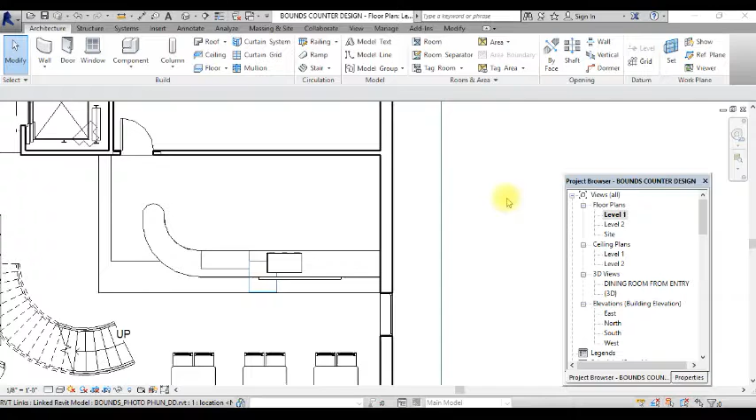Welcome to this session where we're going to develop our countertops in 3D. I'm working in the counter design drawing, which is the link drawing, and I'm going to make a rear counter now. I've got the front counter made with a cutout for the point of sale system, and I've got the espresso machine in there. Now I'm going to make the rear counter.

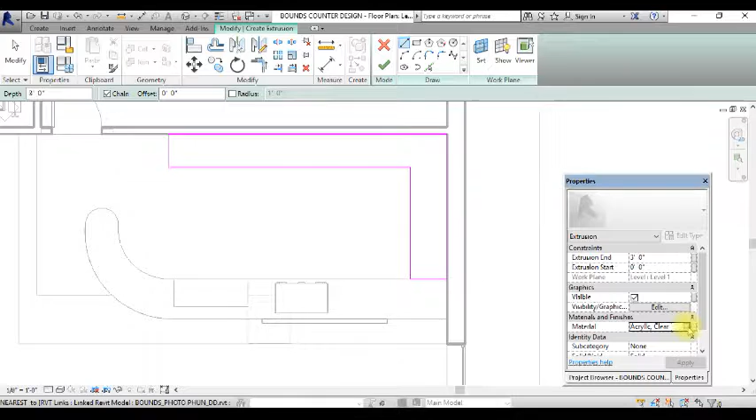You all know how to do this extrusion. I'm going to make this part of the counter a little bit higher than the front part. The front part of the counter I have at 2 foot 10 inches, which complies with my ADA requirements. The back part of the counter I decided I want a little bit higher, so I'm going to make it 2 inches higher, ending the extrusion at 3 feet.

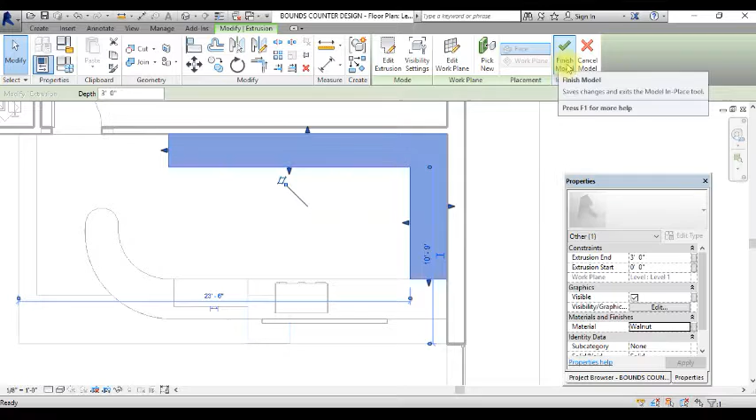To keep things simple, I'm just going to select the standard walnut that's already in the program, and I'll be able to use this same material in the other part of the project, so the materials are going to coordinate.

So we're going to make another component, in casework, and it's going to be the countertop now. This will be for the front part, and I want a little bit of an overhang on the front part because of the way that I'm going to end up doing the base.

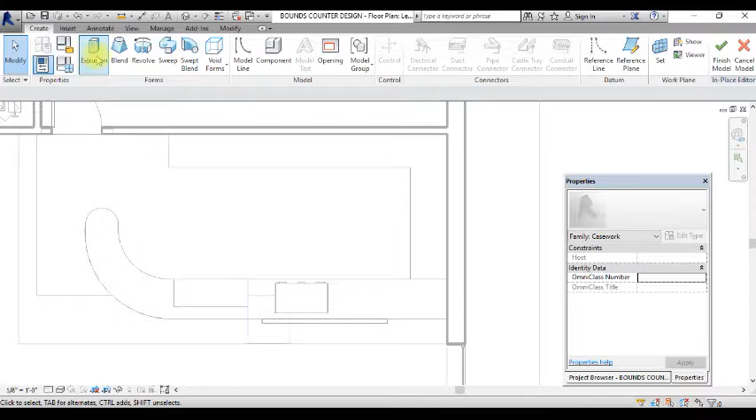We've talked about the 3-inch recess on a base cabinet, but if you overhang your countertop enough, you can make up for that recess this way. I'm going to separate this part of the counter just for now because I'm showing you how, and I'm developing this design myself.

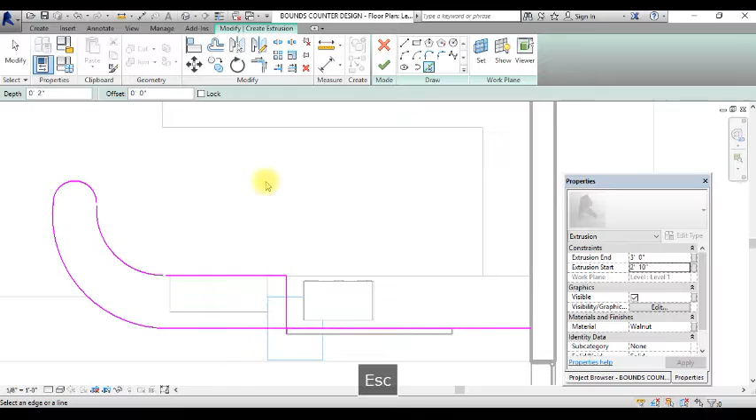So what I just got was the pick tool, the pick line tool, and I'm picking the countertop that's already there, and I'm going to break it at this line and just get rid of this other part.

Now I'm going to offset it 2 inches and let it be on copy there so that I have a 2-inch overhang on all sides of the countertop.

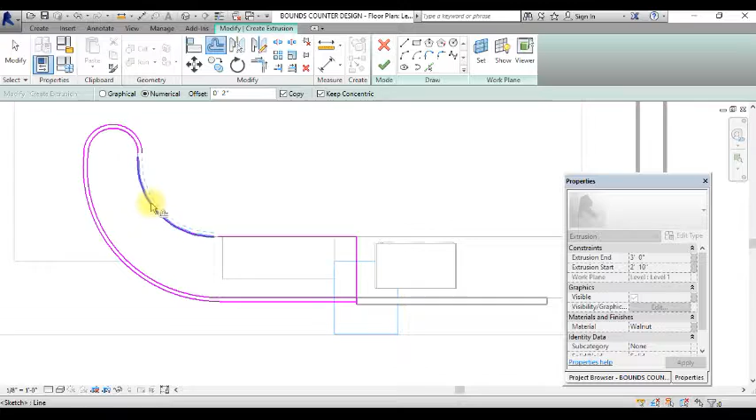Now I don't need it on the inside. I made a mistake there, I'm going to erase that. But I don't need it on the right side either. I'm going to end up extending that a little bit later.

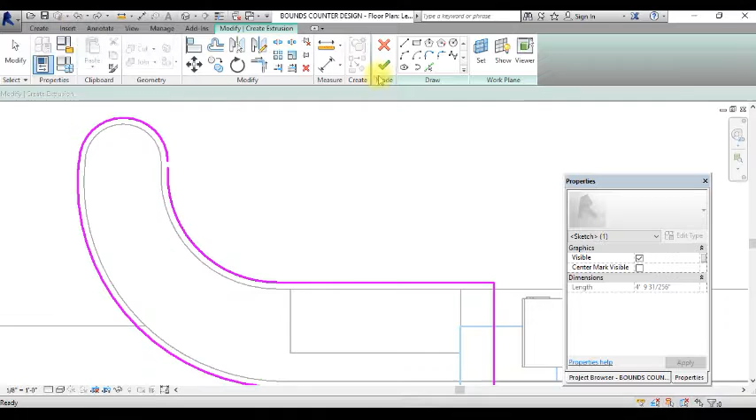Now, it doesn't work really well to fillet the curves, and it's going to change the diameter if I do this, so I'm just going to add a small line to join this gap.

I'm going to check off on that for a minute, but I'm going to check on the material, and I don't have my solid surface countertop, so I go back and I manage that and get that in there.

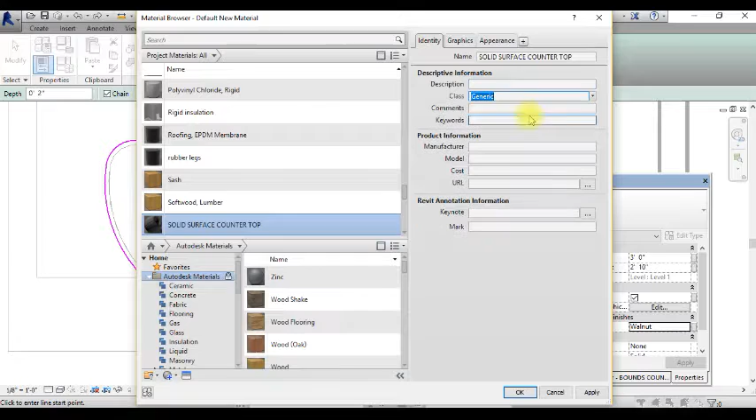So making your materials in advance is very helpful. Here's where I'm going to update the material so that I can find it later under stone, and I'm making the material - I've preloaded a library called Material Package 1, and I just have it in a file as I've suggested for you to do. And of course I'm going to change the scale to be appropriate to the sample that I have.

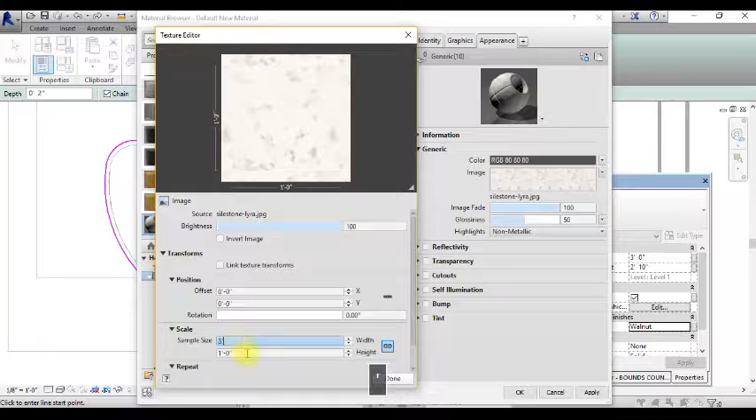Actually I ended up deciding that the 1 foot scale was the better one. So you just have to experiment and look at it, and then come back and fool with it later.

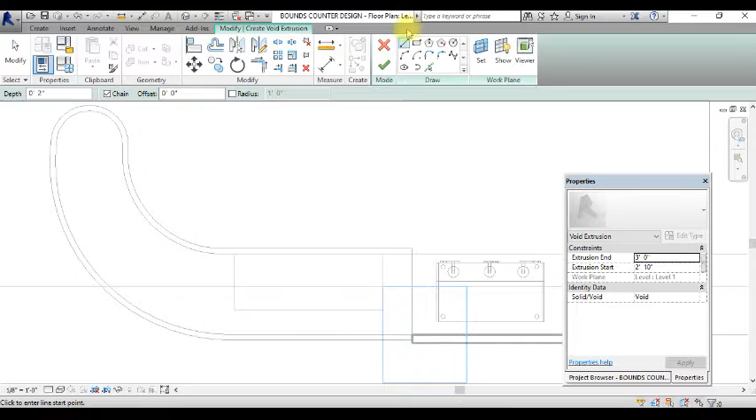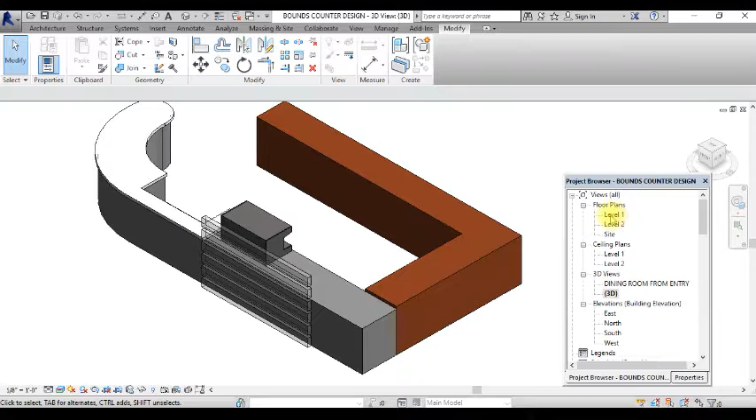So there I've made the countertop cutout. I've got it in solid surface, I've got my extrusion in the back, and I'm going to proceed on to make the countertop in the front the same method that I've done before.

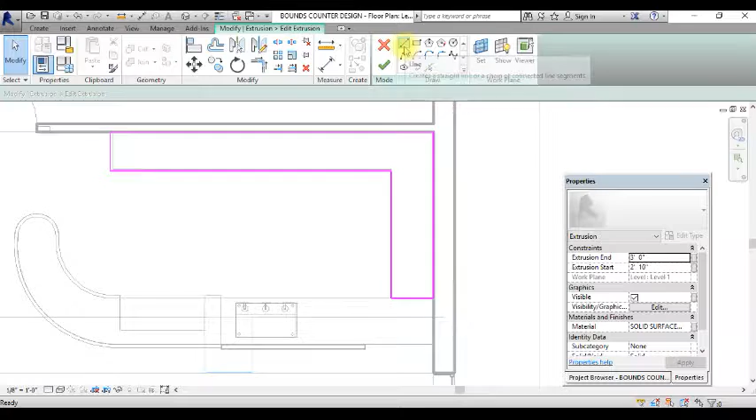We'll come back to this in just a minute. So here we are. I've made the countertop extrusion in the back, and now I'm going to make a cutout in it for the sink. I don't need to make the cutout, but I can make the cutout in the extrusion below as well, and I'll show you how to do that a little bit later.

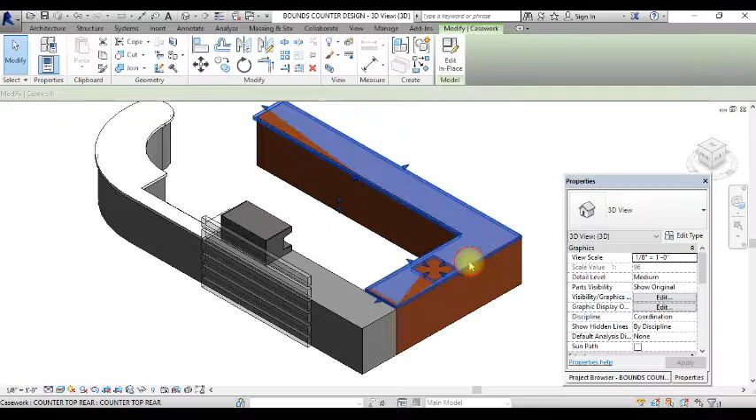So we're going to look at it, and here my countertop is too low into the counter itself, so I need to go back and edit the extrusion in order to raise it up again. I can edit it in this 3D isometric mode, going back to edit the extrusion. I have to click in a couple of times, and I'm going to move it up from the bottom being at 2'10" to the bottom being at 3 feet and raising up to 3'2". And there I have my countertop made.

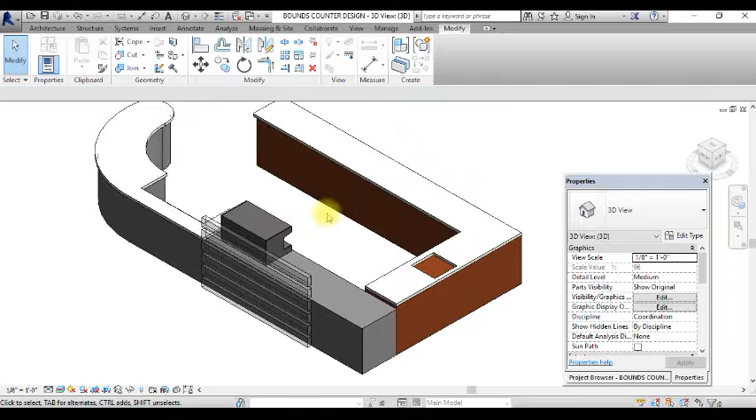Now we're going to make some interior elevations inside of this project as well. We know to get our interior elevations by clicking on them. I ended up deleting the left elevation, but I want you to end up keeping all views of it.

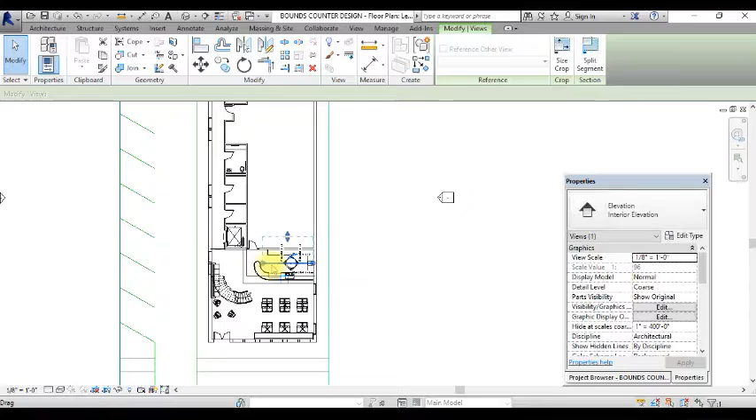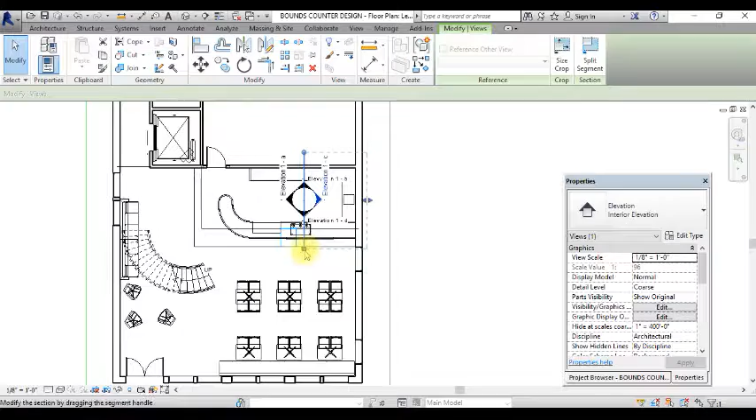This is where we're going to make our cabinet drawing that may be separate from our other file or in addition to it. So I want you to go through each elevation and set it up to be specifically for a cabinet elevation. This is going to be in every view. You're going to have to manage that elevation and how much it shows. We're not interested in the restaurant part at all, only the cabinets. This is merely for your cabinet elevations and details.

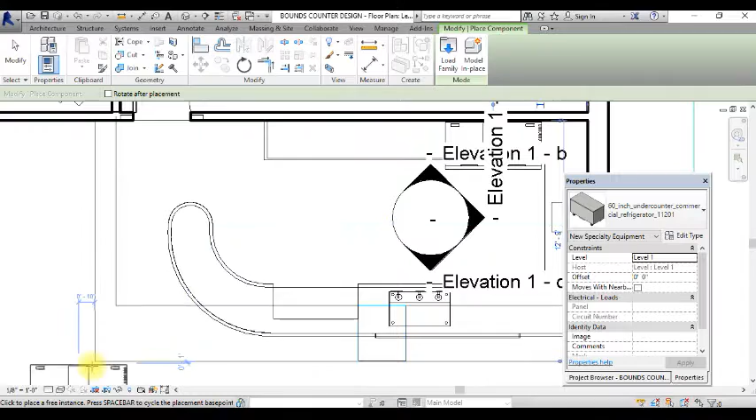Alright, so finish that up. We're going to begin to bring in the equipment into this drawing. We're going to work with the equipment in this file because this is where we're going to manipulate our cabinetry. I've just brought in the under counter refrigerator, and I'm going to have to go back and actually cut out the counter or the cabinet below in order to fit that refrigerator, and we'll see that in a minute.

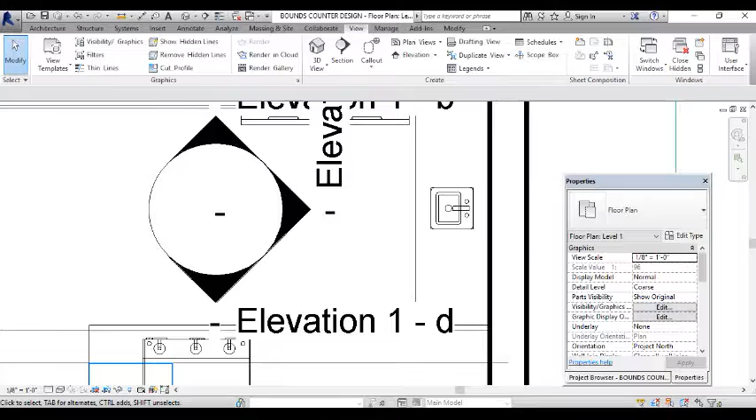But here I am changing my extrusion to come around that bar sink. That's a really tiny sink. Some of the equipment you're going to have to bring up above the counter and look at it in 3D and understand, and maybe from this video you'll see some of the clearances we're going to need.

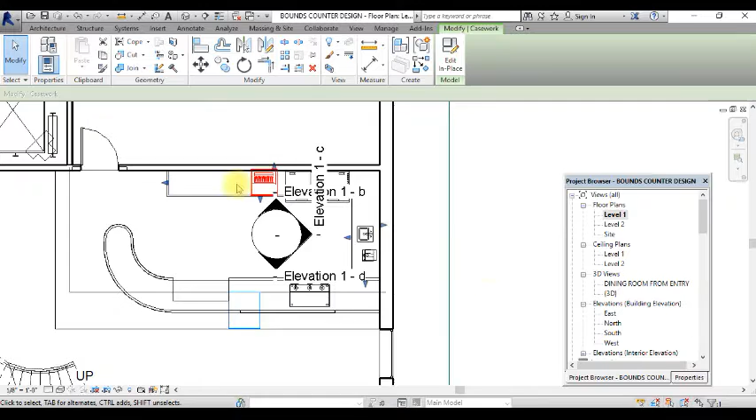So I cannot change that extrusion here. I guess I could edit it in place and do a void, but I'm going to manage it from the floor plan, from the view that I made it in. So I'm going to go to edit in place, and I have to touch it again in order to be able to edit the extrusion, get back to my sketch mode.

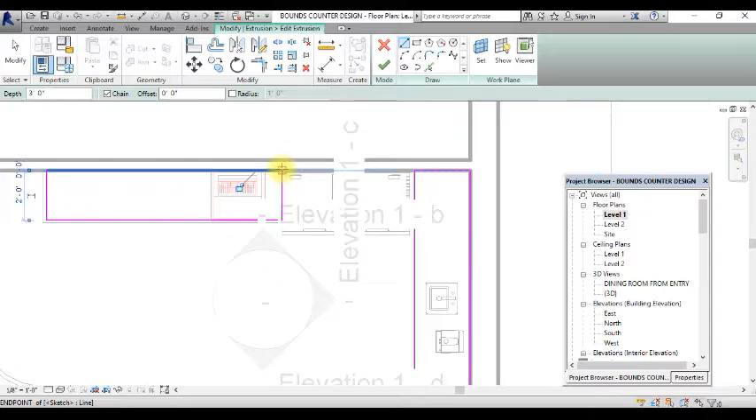So I'm going to put a way to separate the lines, and instead of making short lines I like to use fillet instead, and of course it's going to unjoin some elements, and that's all fine, just some warning things. I'm going to have to put in another line in the back, but that's very easy. So now I have the cutout in the cabinets, which is how it would truly be built.

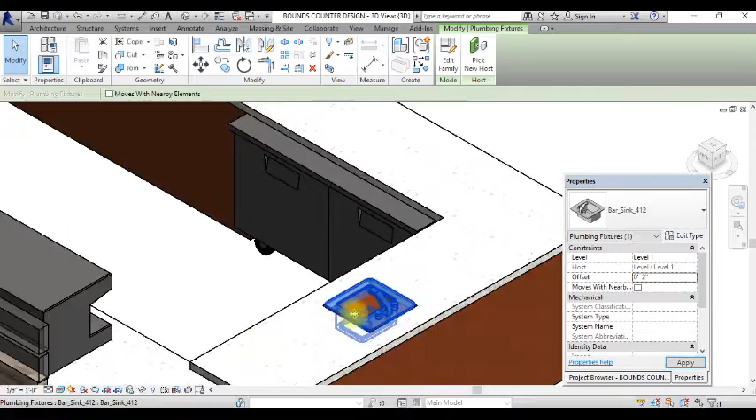And there we go. The refrigerator fits under there, and I can see that my soda machine needs to come up probably to 3'2" in order to allow for the thickness of the countertop and how that particular model was made. And I see the sink needs to be managed in that way as well. So make things accurate for your particular view.

You can see I had a difference in the two countertop levels. Here we can see the finished counter, and so you'll be able to update that in the other file and see it in your restaurant in the next video.